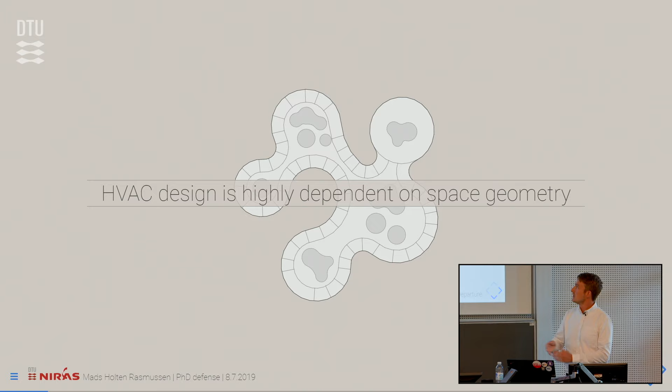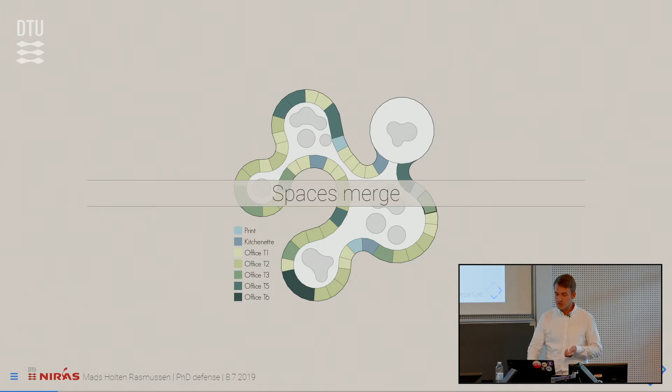I have a few examples. This is a project called Axel Towers in central Copenhagen that I was part of. And when you design a building like this, HVAC design is highly dependent on the geometry of the spaces and the functional requirements of the different spaces. Okay, so that's good. But what when the space functions swap all the time, and when spaces merge, and when walls move around? You know, how do we deal with this?

In the current situation, if you ask some engineer what he needs in order to do a heat loss calculation, he would say, I need the latest architectural drawings. But what he actually needs is something like thermal requirements of the rooms and usages of the rooms, and then some properties related to the geometry. But the way he's receiving that today is through PDF documents. There's no link between it.

Then he puts it into a spreadsheet, and that's good. We usually ask the student worker to do so. It takes a week or something, and everything is good. But it's not really, because it changes. The design changes and keeps changing. And this is just a minor part of a big web of interdependencies. And when something changes some place here, there are so many consequences, and it becomes really hard to deal with over time. Second example is what I call, what I see is not necessarily what you see.

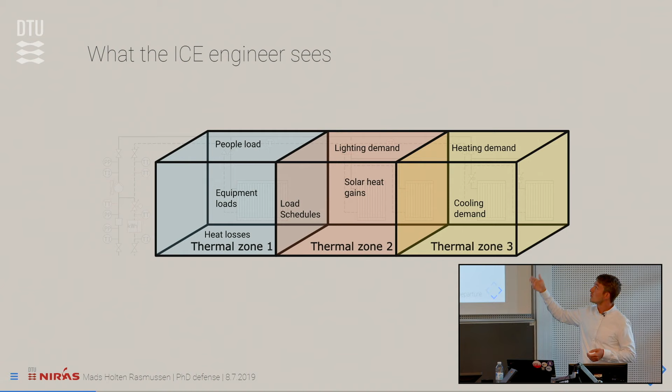If I show you this graphic, what do you see? If I ask an architect, he would say, I see something like offices and some functional requirements. If I ask an indoor climate and energy engineer, he sees something like equipment load, solar heat gains, cooling demands, and stuff like that. If I ask an automation engineer, he doesn't care about the last room there because it has a thermal valve and therefore controls itself.

But the two others are control zones where he has a set point temperature, some sensor that observes this temperature, some controlled device, and an actuator he can open or close to control the flow and thereby impact the temperature. He also has another control system, being the water that is being circulated, and it's very similar.

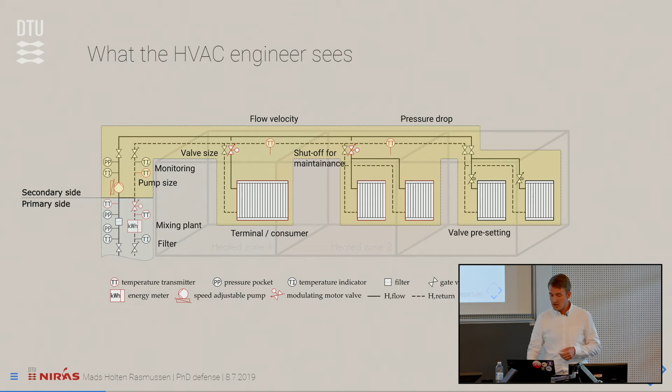The HVAC engineer, that would be me, sees something completely different. He sees the size of the radiators that should be able to fulfill the heating demand, flows in the system, pressure drops, velocities, and places to put valves to distribute the flow and make maintenance possible.

In my opinion, the BIM tools we have today don't really comply with this. If one person initially creates something, it exists in that very model, and if other people want to attach new attributes to the components in that model, it's not really possible.

So that brings me to the research problem. Initially I thought, how do we provide a web-based infrastructure for building data that allows a shared distributed data set to grow organically with the construction project, thereby providing insights and traceability as changes occur, in a form that is consumable and extensible by any authorized agent involved in the project. In this case, an agent is a software that acts on behalf of some user.

Okay, so back to some theory here. Where did we start with computation in the AEC industry? First we had computer-aided design, CAD, basically digitizing pen drawings.

The next step was project websites that allowed us to store documents online, so anybody could go and download the latest state of the project documentation, which was pretty strong. You could attach metadata to it, such as who created it, at what time, and what revision we're in.

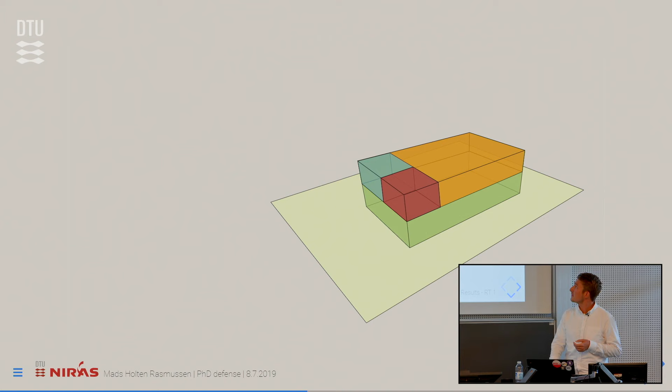Okay, so BOT zones first. If we have a building like this, then in BOT it basically looks something like this. The site has a building, the building has a story, story has a space, space then again has a thermal zone inside of it. So in this way, zone is a way that you can aggregate or you can group.

You can aggregate or you can subdivide zones. So you can use it for thermal zones, or you could use it for delivery zones for a construction manager or something like that. And it has this Babushka-doll principle stating that the site also, of course, includes the space that is included in the building, which is included in the story and so on.

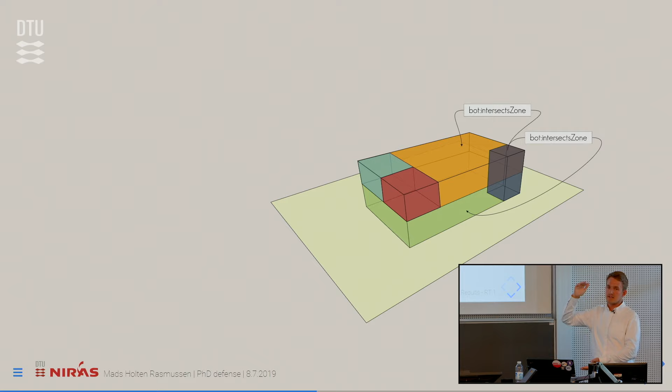Then later, we also have this possibility of describing adjacencies between spaces. And it was later discussed that we also needed something to describe something like a stairwell that intersects different levels of the building. This is really nice because we have different interpretations of what we see.

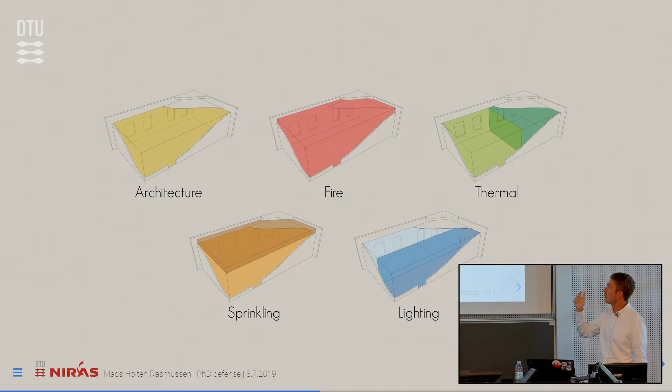The architect only deals with what is below the suspended ceilings. The fire engineer also cares about what's above. The thermal engineer wants to subdivide for future use of the building. Sprinkling has special requirements for what is above the suspended ceiling. For lighting, you want to control something near the facade with the windows in a different way.

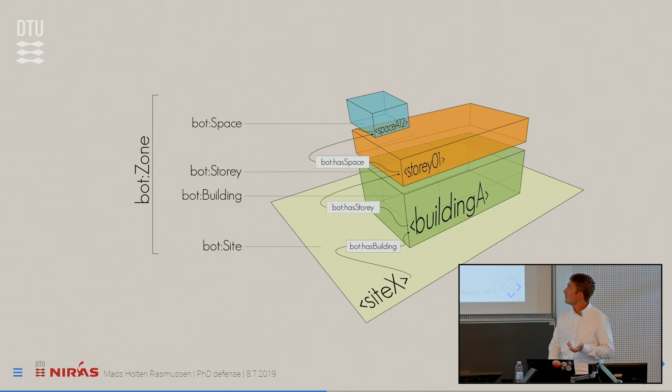Then we have BOT element - same principle. If a BOT element is contained inside a space of the building, it's also contained in all the bigger boxes. BOT interfaces - we had this situation, since I deal with indoor climate and energy.

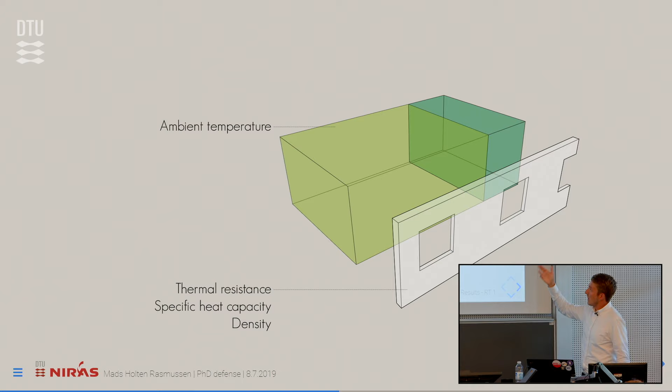We have these two zones. They're both adjacent to the wall. Where do we put the heat transfer area? So the concept was that instead of just saying space has adjacent element, you can put an interface between it and say the space is an interface of both of those, and that way you're able to quantify it. So then we have a situation more like this.

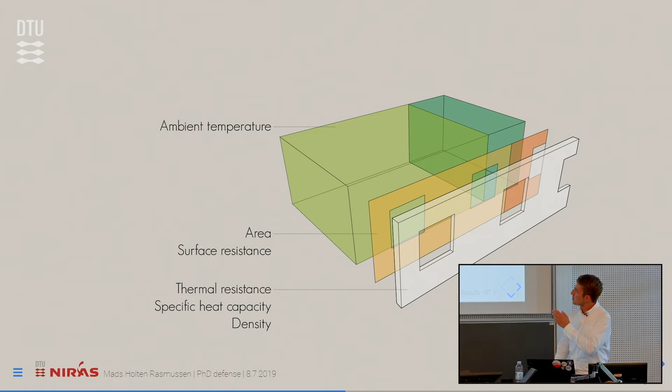So you can put the surface resistance there, you can put the area there. And it would look something like this - the interface is an interface of the zone and an interface of the wall, and the same for the other one.

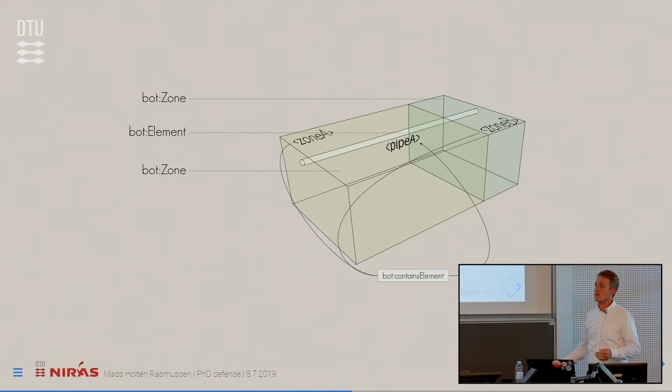Another situation where this would be useful would be a pipe going through several different spaces. How to express the relation to the different spaces, because then we could add thermal insulation automatically just by query - if you're in a heated room, this is what you need; if you're in an unheated room, this is what you need. Or basically just look at the temperature in the zone that you're going through, and that is the reasoning you use when you add your insulation.

And at the terminology side, we might have a flow systems ontology defining what is a heater. This is a heater, and that's the subclass of a BOT element, meaning that if I say my heater is a flow systems ontology heater, then because that is a subclass of BOT element, it's automatically inferred that it's also a BOT element. And that's handled by reasoning, which is done in most standardized triple stores that you can buy off the shelf.

This is another approach: I want to make my own relationship called 'heated by', which is a subproperty of 'contains element', but has a different range. It doesn't just have bot element as a range — it's always a flow systems ontology heater that heats a space. So if I say my space is heated by something, then because contains element is the super property, a lot is inferred: the fact that it's a heater, and the fact that it's a bot element, are both inferred, even though my dataset doesn't contain this explicitly.

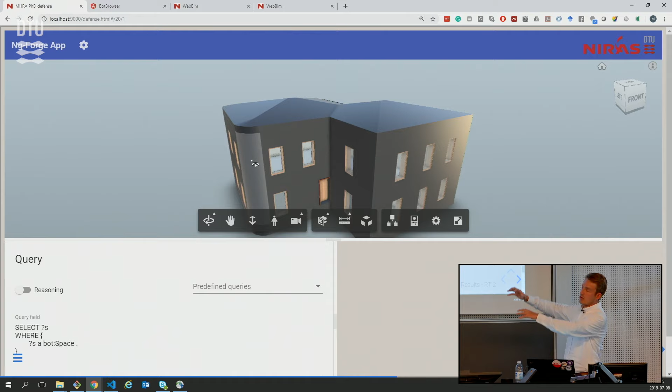So I showed this prototype at Building Smart Summit in London two years ago. Basically what it has is that the geometry is just shown using the internal rendering engine that's part of Forge. So that's all living on their servers, and I don't have any insight into any of that stuff.

But besides that, I also have my triple store that contains all these triples. So I can go and say, give me everything that is adjacent to this space, and give it to me in a list. That was pretty nice because then people could actually see how this stuff worked.

Yeah. Just have to click. Sorry, I lost something here. What's this one?

Okay, the next thing was we don't necessarily need this geometry in order to represent some resource. That was also pretty hard to explain to people — like, okay, we can have the spaces without the geometry, because then you can start talking about them, and this is nice. But we also said, okay, geometry is just a property like any other thing, an attribute like any other thing you can attach.

So say in your dataset you have something which is a space, which is then also a zone. It has a name, both in Danish and in English and all that stuff — that's part of the RDF schema. But you could also say it has a space boundary, and it also has this 3D model, and could even have 10 3D models at different levels of detail, or for different purposes.

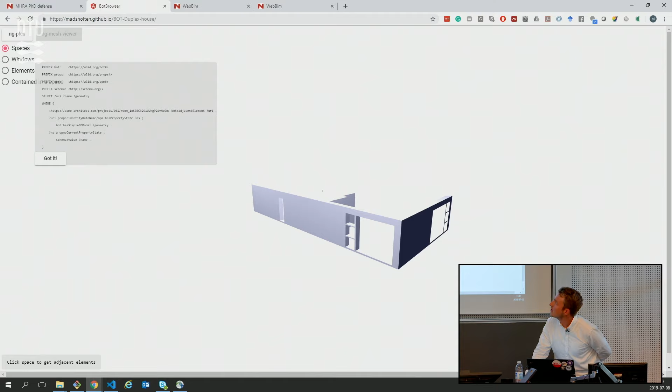Then I developed this prototype to show how this worked. So basically here, asking for all the levels in the building, all the stories in the building. When you click a story, you get all the spaces, get all the room boundaries. I'm not sure why it doesn't work here, but fortunately I also opened it here. So basically you can click a space, get the adjacent elements, click it, go back, get the adjacent elements. Or you want all the windows in the building, you want to see all the elements, you want to see everything contained inside something else.

So basically that. Okay, next experiment was integrating with sensor observations. We had this Revit model of Navitas, a building in Aarhus, in Revit. I wrote a parser so we could parse it to bot. So we got this: it's a building, it has some levels, it has some spaces, the spaces have names, they have 3D models described in OBJ, space boundaries in well-known text.

Then we had these sensor readings in spreadsheets basically. There already exists an ontology for that, a W3C recommendation, so why not just use that? They already describe what a sensor is, what an observable property is, and an observation. So basically all the sensors, what they observed, and all the observations were modeled in that way.

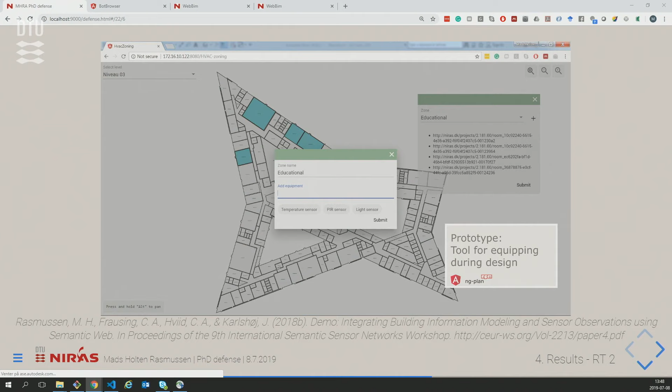We had this vision that the engineer could basically just describe that this space has a sensor and all that stuff, without even drawing it, because it doesn't need to have geometry. And then when you put all this together, you get all the semantics from bot and all the inference rules, meaning we can get all this nice stuff with the containment and so on.

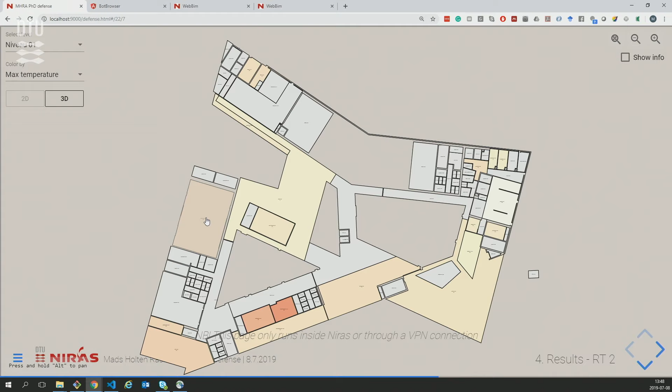And then again, develop the prototype to show how it worked. So something like: give me some storey here, then give me all the maximum temperatures and color grade them based on the temperature. When you click a space, give me the sensors contained there, and give me all the readings from these sensors. A very simple way of showing how you can navigate such a knowledge graph in a user interface.

Okay, then research task 3, dealing with these evolving interdependent design properties. The ontology for property management, OPM. We often describe these projects as going from planning through design to construction, but the situation is more like this if you're from the industry and you know how it works.

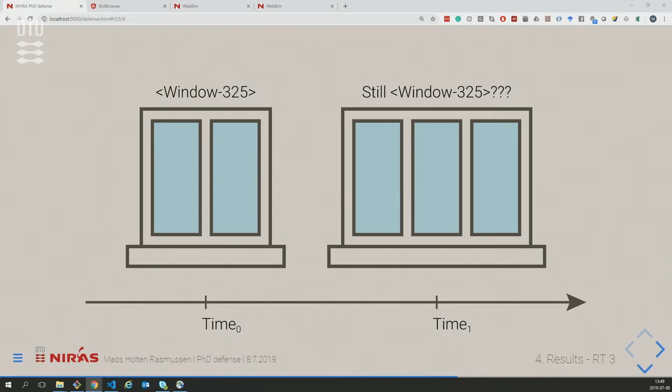So what I was wondering was, okay, if we have a window that at some point in time looks like this, and then it looks like this at some other point in time, is it still the same window we're talking about? In London, I also showed this illustration. The idea here was that the architect, that's the black thing there, draws the wall. The indoor climate engineer extends that data set and puts some thermal properties on a heat transmission surface, and the structural engineer adds a reinforcement definition over there.

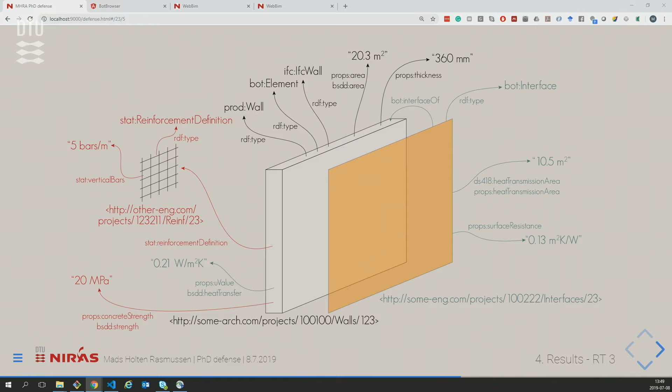Then we have a problem if that wall does not exist and is just taken out of the project. So I think we would rather that it's just the same wall with a new property. So resources shouldn't be deleted. The idea was that instead, it's just window 325, but with some changed attributes. And this can be handled with 3 different levels.

The most simple way of describing some attribute in RDF is just a data type property. So window has width 1800 millimeters. But then it's not possible to describe who made this and why he made it, adding metadata to it. What we can instead do is put an intermediate node in there and say the window has a property and that property has a value, and it was generated at a time and it was attributed to a person. All these terms are from another ontology called the provenance ontology. So again, something that already exists and is widely used.

But what if we wanted to change over time and be able to capture that? Then we need another layer. We introduced the concept of property states. So a property can change state over time. First, I defined it as 1200 millimeters, and then Christian at some other time defined it as 1800 millimeters because he changed it. Of course, this is not something you model yourself. The tools take care of it, but it's a data model that takes care of it. What you can see is that only one of them is classified as the current property state.

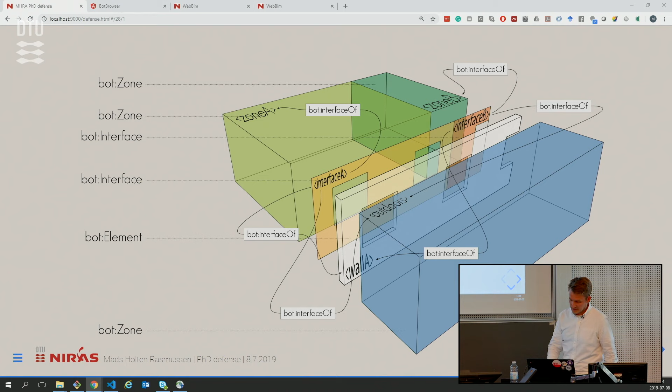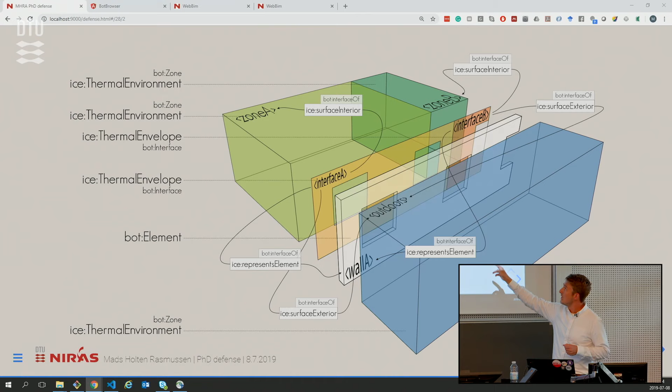And this was also implemented in a REST API. An example of this would be something like this again. If we go back to the example with the heat transfer through the wall. So we make, again, an extension of BOT called the ICE ontology with thermal environments and thermal envelope. So those are the unique things that we want to specify here. Then the interfaces are not specific enough for our purpose. We want to know what interior it touches, what exterior it touches, and what element it represents, because that's where we're finding the U value, and those places are where we're finding the temperature sets. Looks something like this. Won't go into that now.

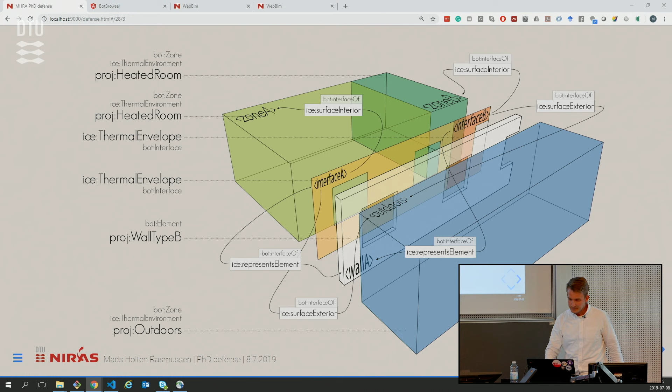And then we can make our project-specific ontology, where we say, okay, in our project, we have a class that we call a heated room. A heated room always has some properties, for example, and the same, we have a wall type B, and this is how we see a wall type B. So independent of how the architect defined the class of the wall, we can say, from our point of view, it's an engineering wall, it's a wall type B. Okay, and that looks something like this.

And then we can actually make property restrictions and say, every time I have a heated room, on the property design ambient temperature, it needs to have the value 20 degrees Celsius. And the same for outdoors, that's minus 12. And the wall type B always has 0.25 watts per square meter Kelvin. That will automatically be inherited to all the instances of this class. And this is also taken care of by reasoning.

And I actually built a REST API called OPM REST, where these calculations, since they have a URI, when you send a POST request to the URI, it actually goes and checks. It knows all the properties of the calculation. So it checks for everything, every place where that argument path is applicable, and then it infers the first inferred property if it can do so. A PUT does the same thing, but it looks for all the places where the property is already inferred, but where one or more of the arguments has changed, and then it updates it with the new value.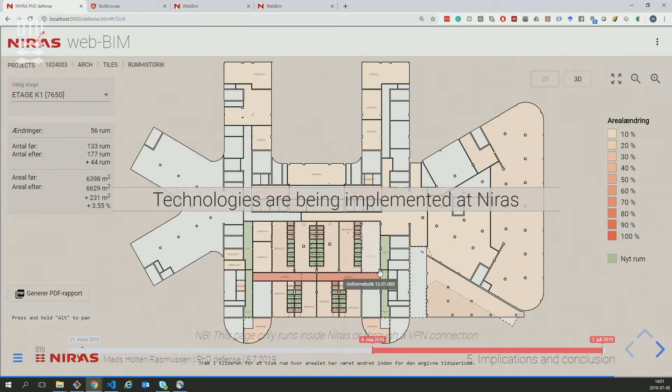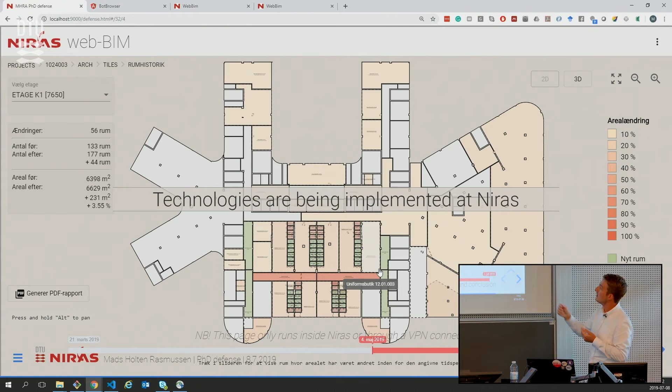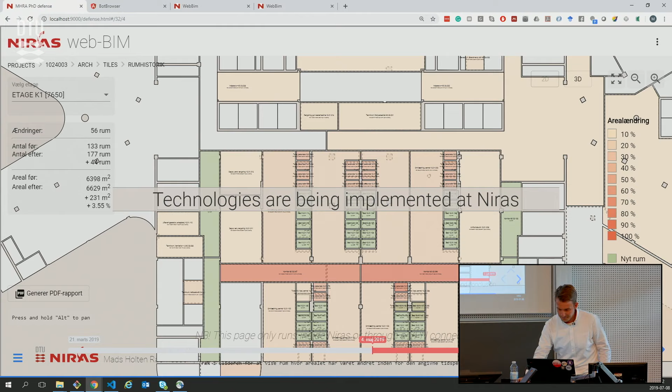And what we're doing here is that we're saying, okay, what was the state at the first period? What was the state at the last period? Did the area change? How much did it change? That's a color gradient. Is it new? That's when it's green. And then the two space boundaries are laid on top of each other, and you can see the dashed lines here indicate that it's the old one. So that's one example of a tool.

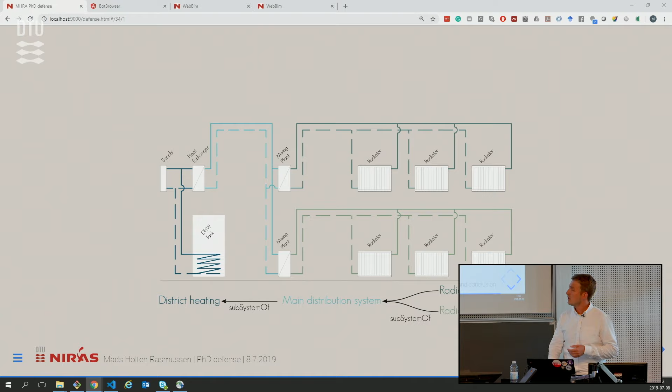Future outlook. I did some preliminary work on flow systems, a flow system ontology. It stopped when I started working on OPM because I found that we needed these mechanisms in order to progress. Fortunately, there is a new PhD working in this domain called Ali, and I'm fortunate to also supervise him. But yeah, we had some preliminary work in this.

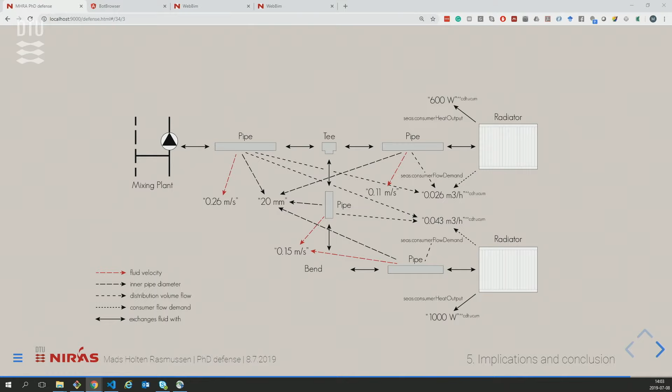The idea is that a pipe feeds a T, which feeds another pipe, which again feeds some consumer. If you make feeds a transitive property, you could just stand at any particular place in the graph and say, I want all the consumers that this pipe feeds indirectly. And then I want the sum of the flow, and then I want to calculate the size of it and infer that. So an explicit structure for pipe systems, which would be pretty nice, especially for retrofitting of buildings, if it could just recalibrate.

Then I had these thoughts of how do we go from research to standard? And again, if we have this top-down, bottom-up approach, I think very much that universities and companies should engage in growing and building these ontologies. Like in Niras, we're building an ontology to describe the world, because just internally in a company with 2,500 people, we use very many different terms for the same thing. And if we can just solve that internally, then we really stepped up.

And if we share that ontology, why not just pick it up as a national standard, or at least refine it and use it as a national standard? For us, it makes a lot of sense if people reuse it, because then we have greater interoperability. And why not utilize that we have so many bright students?

You say everyone can develop their own ontologies, but you should always use the ontologies that have higher acceptance, so more people use them, and that are maybe developed by some organization that has some substance to it, like OGC or buildingSMART.